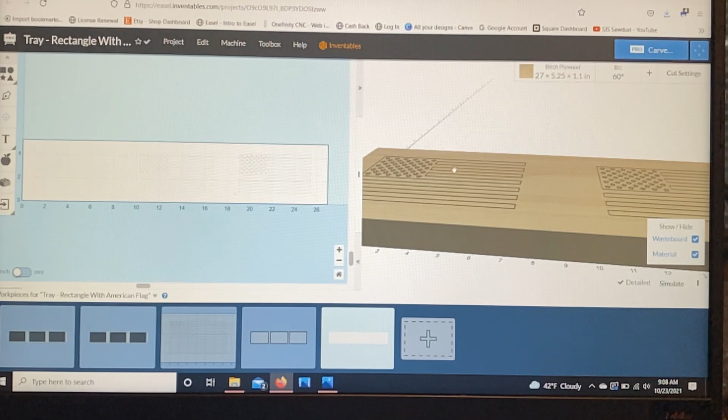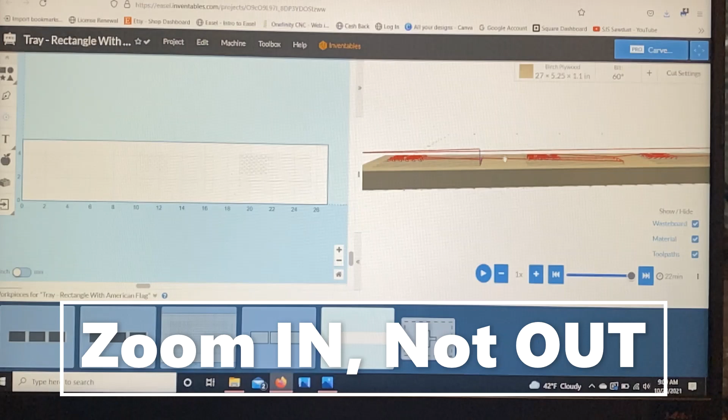If we look over here on the right side to the preview screen, I will hit simulate, and this will show me exactly what my bit's going to do. So as you can see, it's going to cut out all 3 of these flags. Everything looks good there. But if you zoom in, you can see that you have a red line height up here, but then you have a red line height right here.

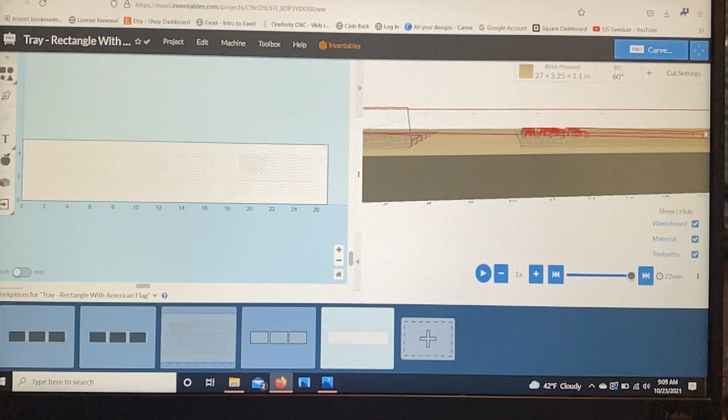This top red line height, that is your origin height. So from home or origin, the router is going to stay whatever it happens to be set at. I have it 1 inch. It's going to stay 1 inch from home, from origin, come over, plunge down, make its cuts, move over, make its cuts, go to the 3rd flag, make its cuts, and then it needs to go back home or origin. So it's going to jump up that 1 inch, and it's going to go all the way back to the starting position back here. So it's treating this as one large file.

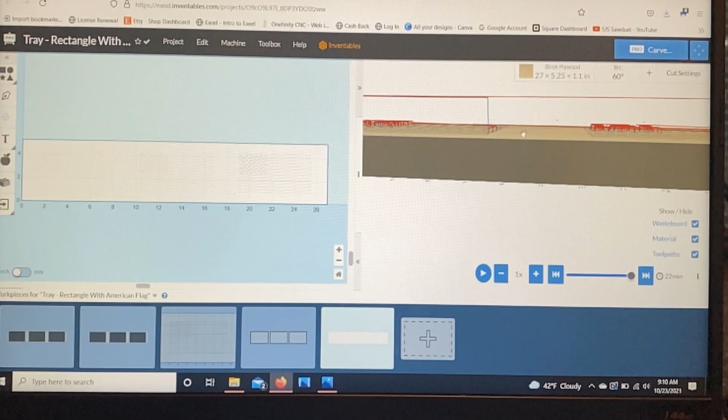Only problem with that is, as you can see, it's going to plow right through the edge of our bowl. Because remember, our bowl height is roughly up here. It's about 5/8 of an inch up from this work surface because we need to put this detail in the bottom of our bowl. So this is no good here.

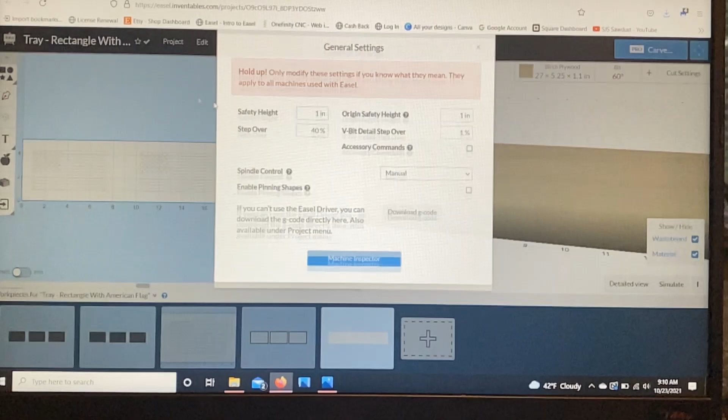So an easy fix for that, you go to Machine, General Settings, you change your safety height to 1 inch, and that matches now your origin safety height. And let's see what that does. You hit simulate on that. And now you can see we have successfully avoided plowing through the edge of our bowl.

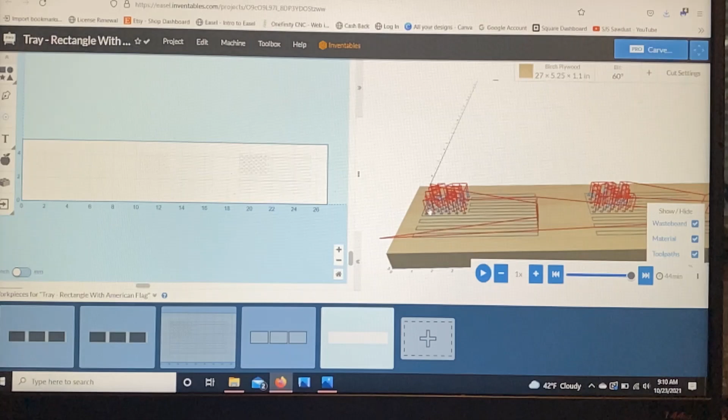That's great. But if you look, there is a lot of red over in this area here. These are all the stars. So basically it's going to cut 1 star, lift up, move over, back down. You're adding a lot of extra time. You're going to waste too much time here doing it this way.

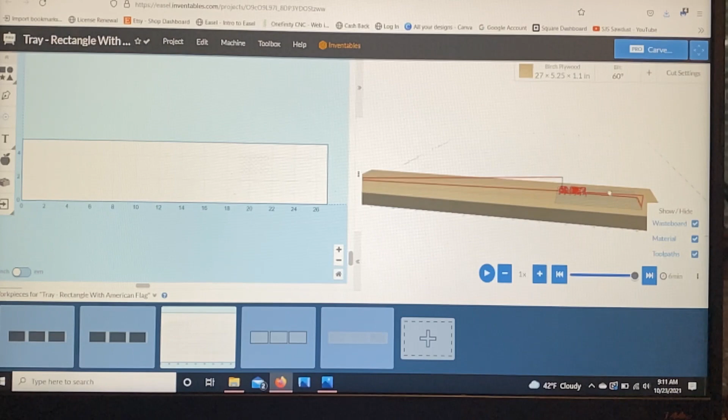So my suggestion on a file like this is you just come over to another window and you set 1 flag up here. So you've got 1 flag set up here. You have your origin height at 1 inch. You have your safety height at the 0.15. And as you can see, we're good here. It will come over, plow down to 1 flag, cut all the detail, go back up, and then go back

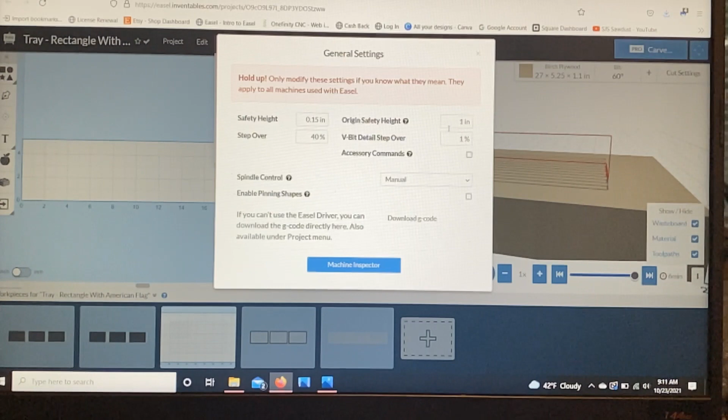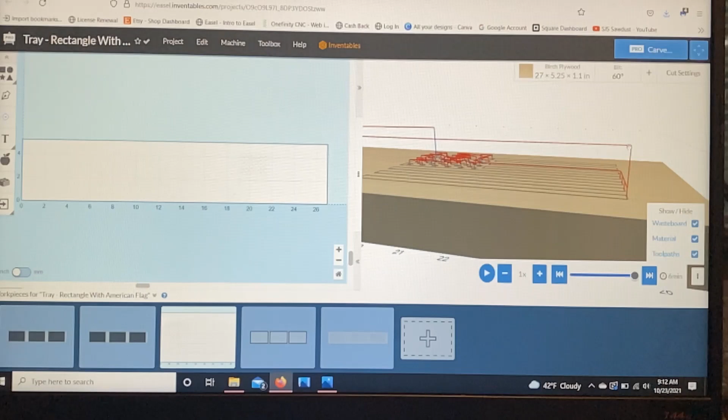home to origin. So we would go to our machine, our general settings, and this is what we want to see. Our origin safety height 1 inch, and then our safety height 0.15. This distance right here, that's our 0.15 right there, and that's fine because we're staying in 1 bowl cutout. And then our origin is our 1 inch, so it will go up high enough to clear the work surface and go back home. So there's 2 ways to run this.

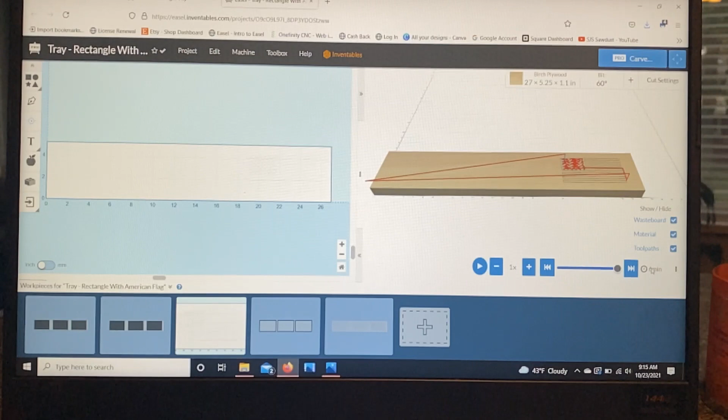You can either run this as 1 individual file with your safety height being lower. If we look here at the cut time for this single flag, we have 6 minutes. If we were to triple that, because we would have all 3 flags on 1 piece here, that would be 18 minutes. If we come over here to the triple file that has this 1 inch safety height, it's 44 minutes. So that's roughly 2.5 times as long. So you're adding a lot of extra time in order to cut it this way.

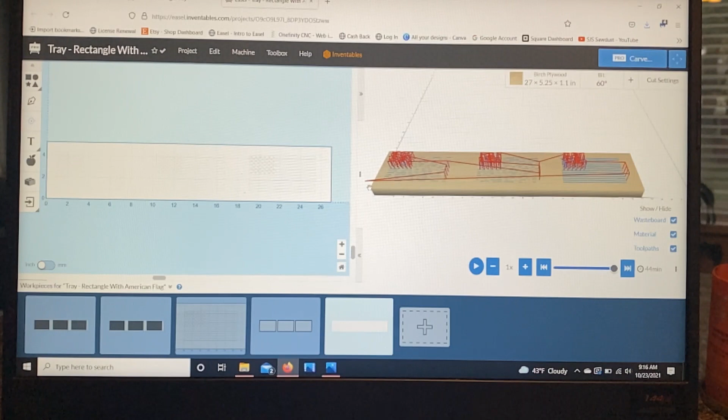Now, if you have the time, you're in the garage, you're not in any kind of rush, you can set it up like this and it will cut correct. We will not plow through the edge of our bowls. But if you want to get these done and you are in production mode, you want to run this file 3 separate times.

Tip number 3, when you're setting these up, give yourself a little bit of leeway on the dimensions. When I set this particular bowl up, I set my project board to be 7 1/4 inches, and it turned out to actually only be 7 3/16. So if I zoom in real close, you can see a flat spot right there. So I didn't have my OD correct.

So this bowl here, even though I took all the time and the effort to cut it, it's pretty much useless. I use this inside the house, but you can see it doesn't even have finish on it. I decided to not take it any further. Also, as I look at this thing, I can notice that this walnut strip is not right down the center, which brings me back to my first tip.

Run all your files from center and you won't run into this. So this must have been when I was still running from lower left. So this bowl here's got a lot of errors. Thin wall, flat spot, and my walnut's not centered.

Tip number 4, make sure you clamp down your workpiece well enough. I thought I had this one clamped down well enough. I was using the glue and tape method, and this piece I had taped down to a sacrificial board because I didn't want to mess up my work surface. But that sacrificial board was what I didn't have clamped down well enough.